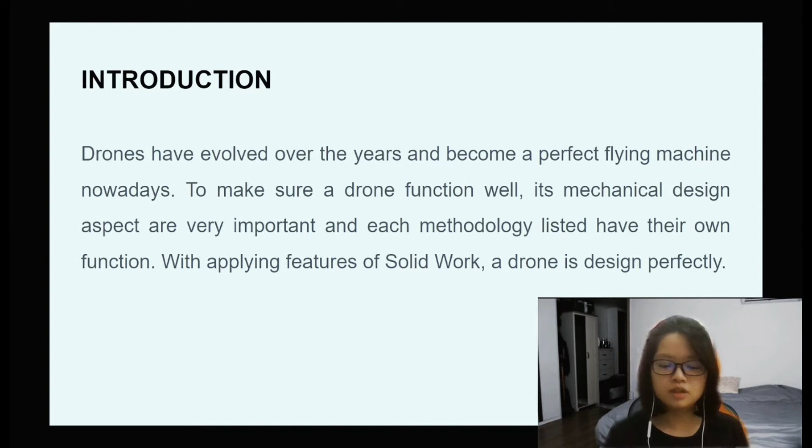Next, I'm going to introduce what a quadcopter is. Actually, a quadcopter is called a drone, and drones have evolved over the years to become a perfect flying machine nowadays. To make sure a drone functions well, its mechanical design aspects are very important, and each methodology listed has its own function. In this mini project, we're applying the features of SolidWorks, and a drone is designed perfectly. The objective of the mini project is to demonstrate the detailed design of the quadcopter and to demonstrate how the quadcopter works.

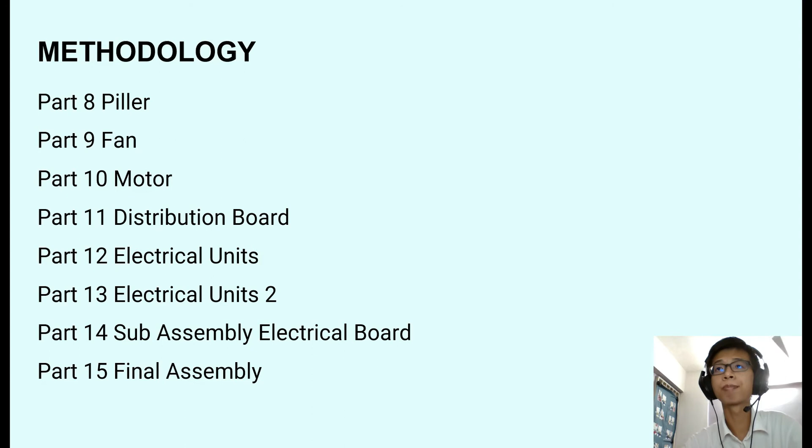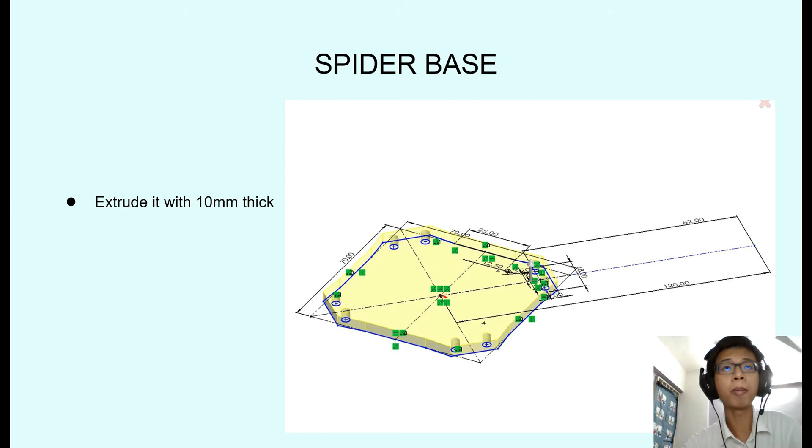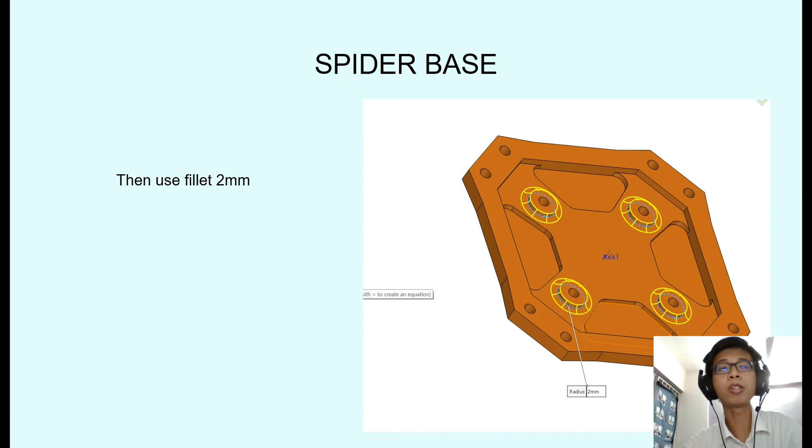This is part 1, spider base. First we use the top plane, sketch a diameter of 70 mm, 25 mm, 82 mm, and 120 mm. Then we extrude it with 10 mm thickness. Then, using the top plane, sketch a diameter of 12 mm and 50 mm. After that, we draw a 3 mm circle and extrude it with 2 mm thickness. After that, we use fillet to do 4 corners at 2 mm. The spider base is done.

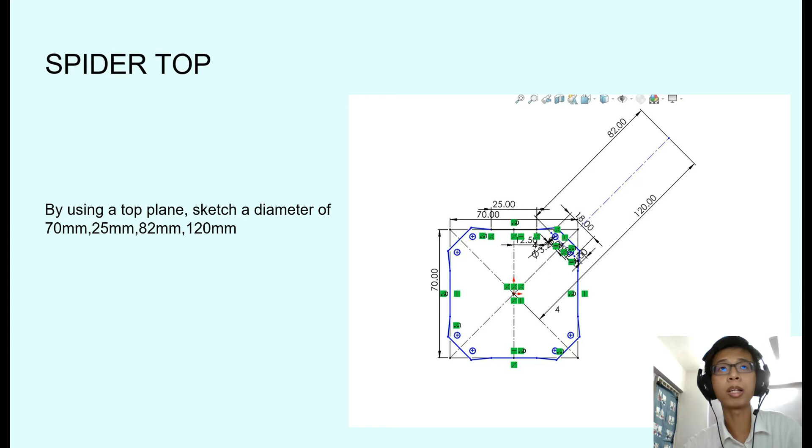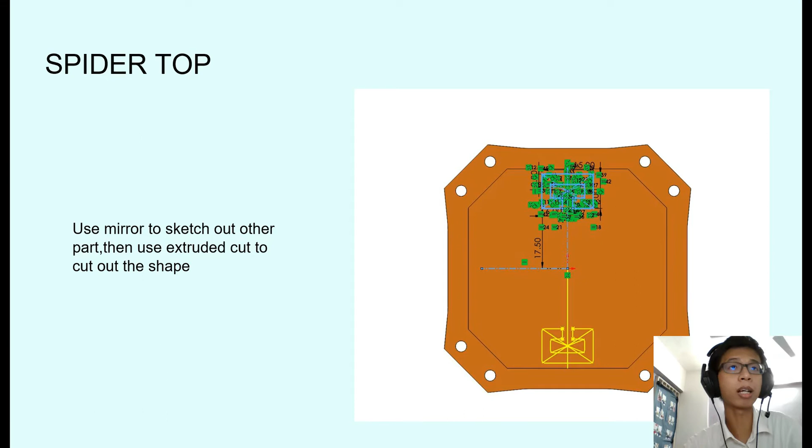Next is part 2, spider top. Same as before, we use the top plane, then use diameters 70 mm, 25, 82, and 120 mm, with 10 mm thickness. Then we sketch the diameter 50 mm, 3 mm, 10 mm, 6 mm, and a 2.8 radius. After that, we use mirror to sketch out the other part, then use extrude cut to cut out the base shape. Then we sketch a diameter of 35 mm and 30 mm and extrude cut to cut out the shape. The spider top is done.

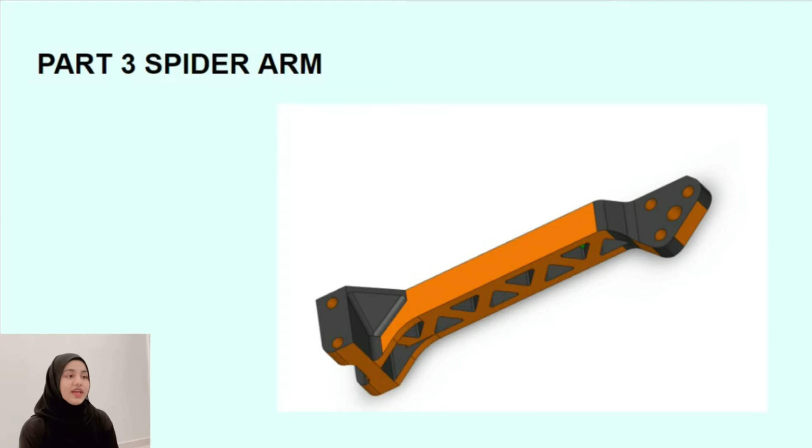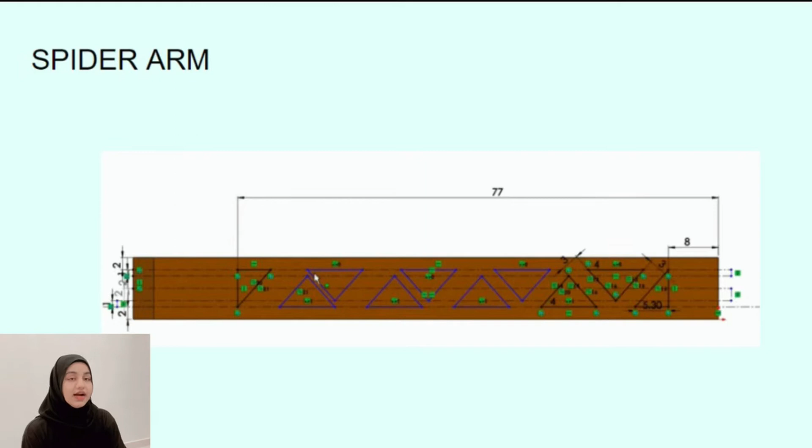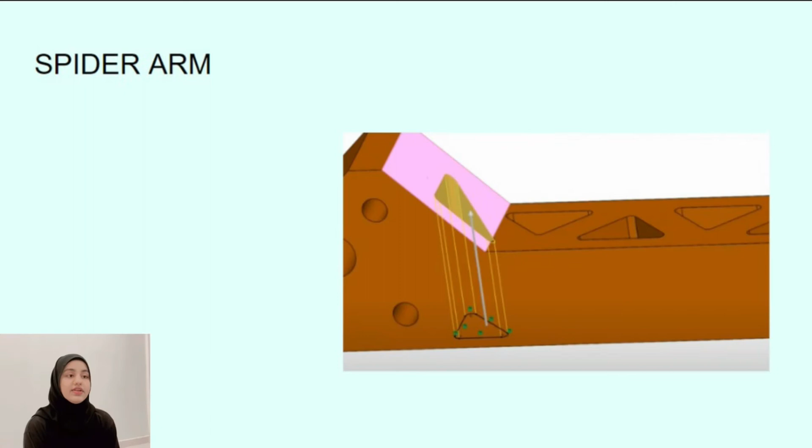I produced this spider arm with the right size so that I can produce a perfect drawing. After pressing the extruded boss button to turn my sketch into a 3D drawing, this is the result. To make it more interesting, I added color to the spider arm to look more attractive. Then I continued to create a triangular pattern on the leg of the drone to further beautify the spider arm part. After I drew a 2D drawing, I converted it to 3D. Not only that, I designed the spider arm into a more complex look. Using the tools provided in SolidWorks, I used fillet tools to curve all the constructed triangular parts on the sharp sides. After that, I added 2 more shapes in the spider arm, this part and also this part. Then I removed a few parts here using the extruded cut tool according to the proper size. For the finishing part, I used fillet tools and the chamfer parameter. I also put a small hole for the stand. Finally, the important part, the spider arm, was complete.

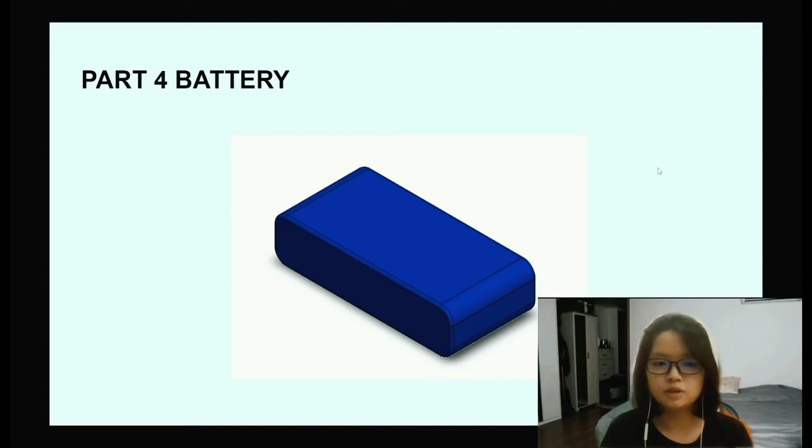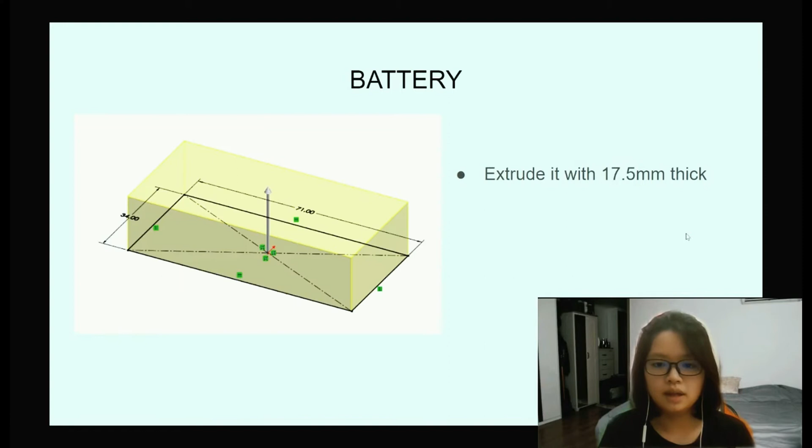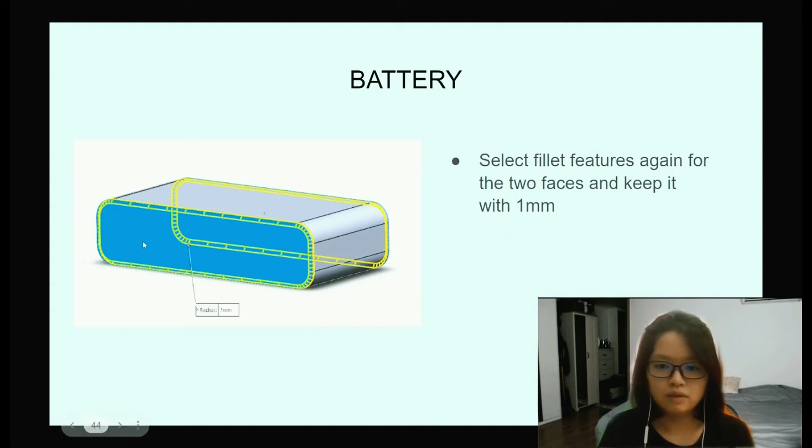For the battery, using the top plane, sketch a diameter of 71 mm by 34 mm, then extrude it with 17.5 mm thickness. Next, we use fillet features for 4 corners, each with a 5 mm parameter. Select the fillet features again for the 2 faces and keep it at 1 mm. Lastly, choose a blue low gloss plastic color for the battery.

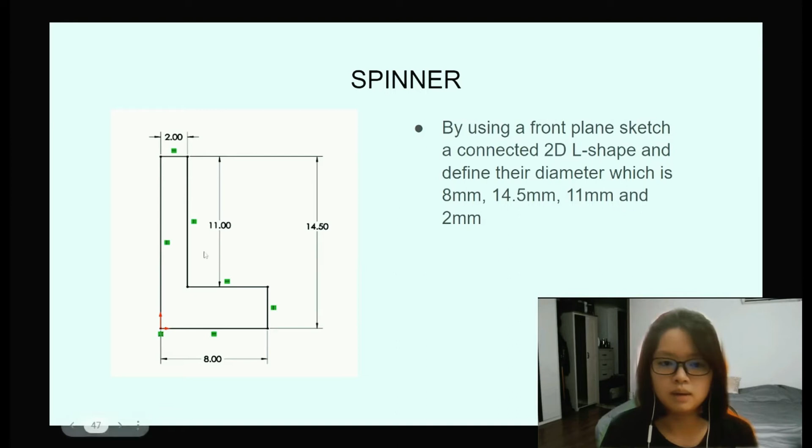In the next part, part 5, called the spinner: we use the front plane and sketch a connected 2D L-shape, defining the diameters as 8 mm, 14.5 mm, 11 mm, and 2 mm. Next, we revolve it, selecting the vertical line as the axis. Next, we draw a big circle with a diameter of 9 mm and use the hole wizard feature to make 4 positioned holes.

Lastly, we define some metal color for the spinner.

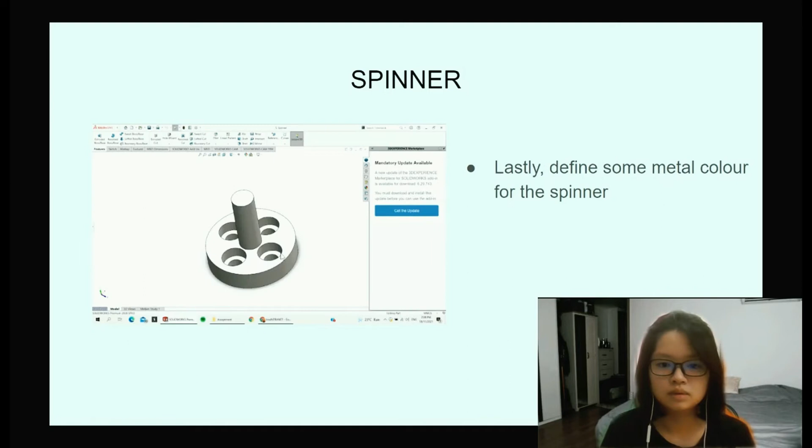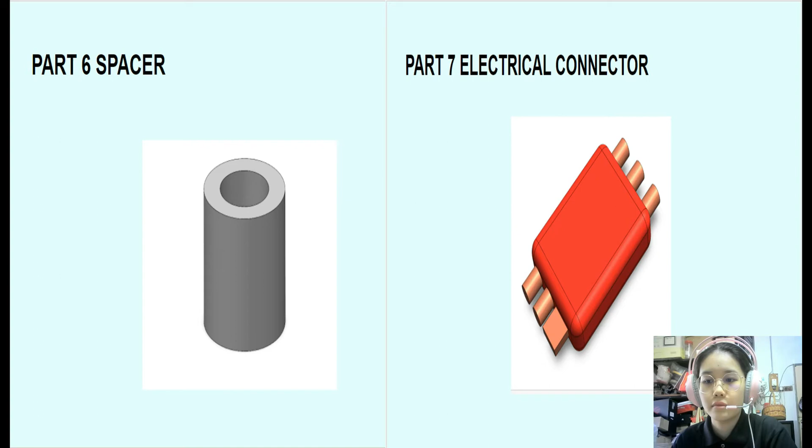I will present 2 parts of the quadcopter. It is the spacer and the electrical connector. To start with, select top plane, sketch 2 circles, and the length is 5 mm and 3 mm. Select extruded base, and the dimension is 6 mm. Last, the spacer is done.

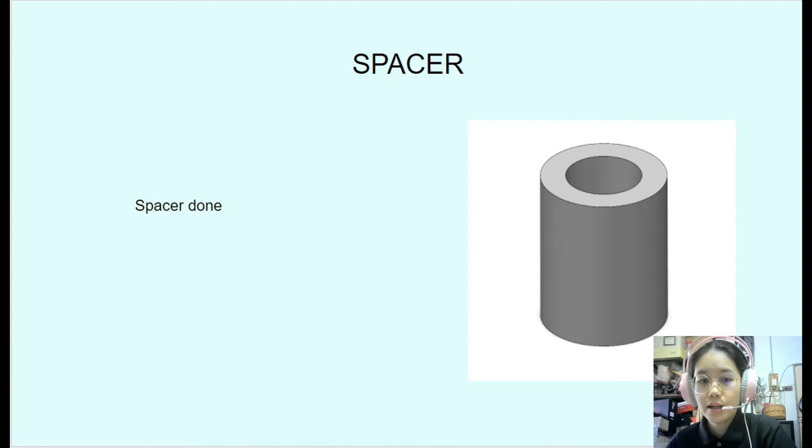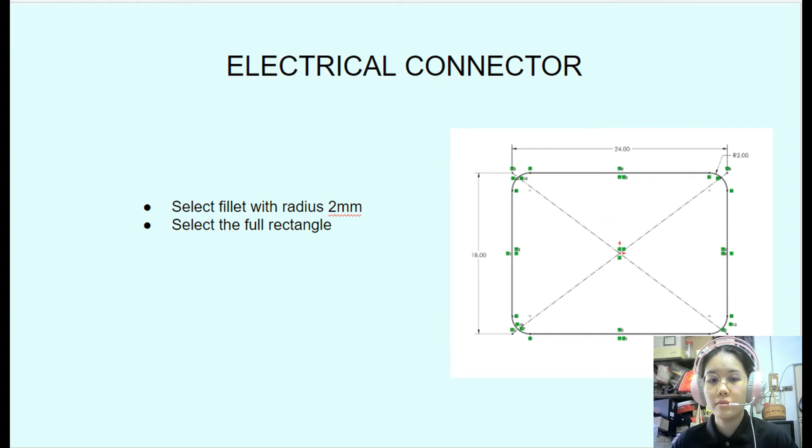Continue with the electrical connector. Select top plane and sketch 1 rectangle, dimension is 16 mm width and 24 mm length. Select fillet with radius 2 mm. Select the full rectangle. Select extruded base with the dimension 7 mm.

Select fillet. Select up face and down face with the dimension 2 mm. Select the full rectangle. Apply red low gloss plastic color on it. Next, select side face of the rectangle. Select normal to. Draw a center line in the middle and sketch 3 circles. Select 3 circles. Make it relation equal.

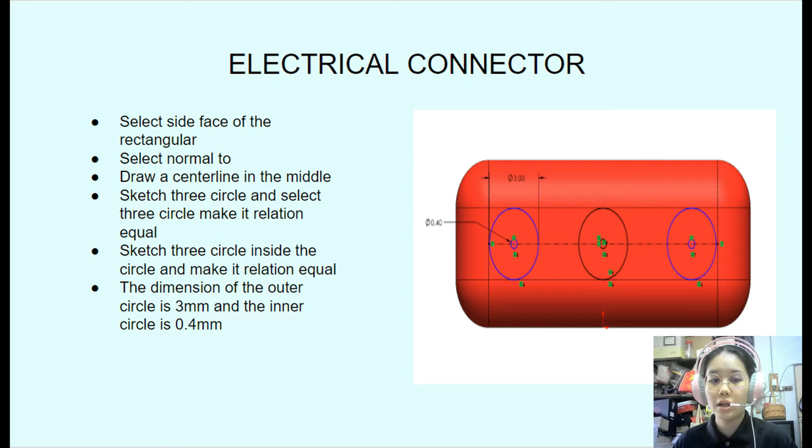Sketch 3 circles inside the circle and make it relation equal. The dimension of the outer circle is 3 mm and the inner circle is 0.4 mm. Select the extruded base with the dimension 4 mm. Select the 3 circles and apply polished copper color on it. Last, select the other side of the rectangle.

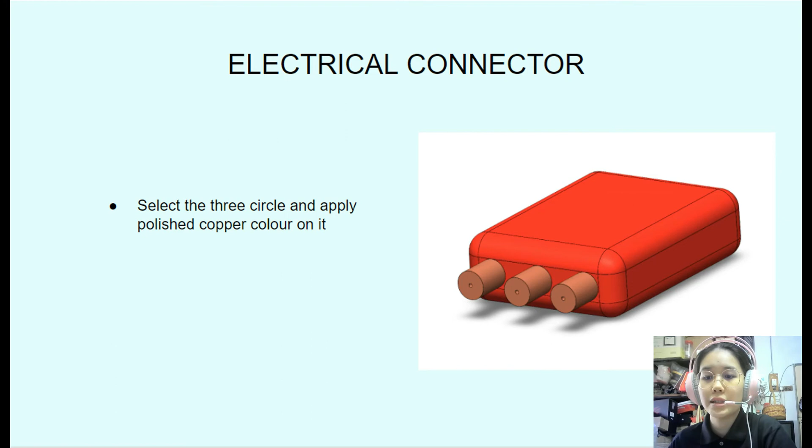Select normal to. Select center line and draw a line in the middle. Select corner rectangle and sketch the rectangle at the right with the dimension 4.5 mm length and 1.5 mm width. Make it relation equal with the center line. Sketch 2 circles, 1 in the middle and 1 at the left side.

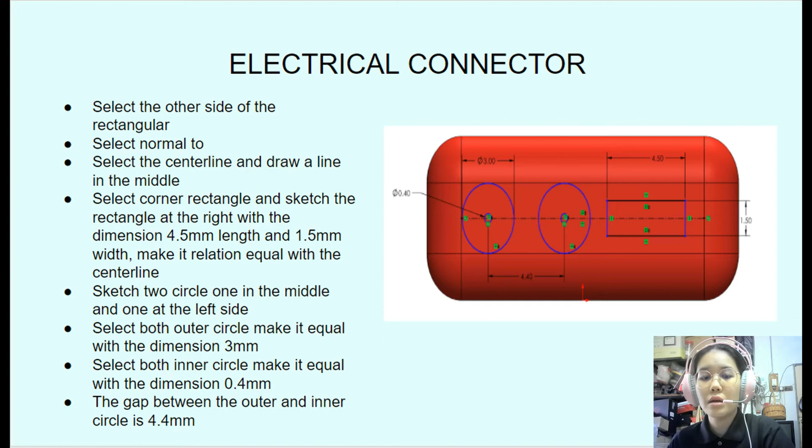Select both outer circles, make it equal with the dimension 3 mm. Select both inner circles, make it equal with the dimension 0.4 mm. The gap between the outer and inner circle is 4.4 mm. Select extruded base and apply polished copper color on it. Finally, the electrical connector is done.

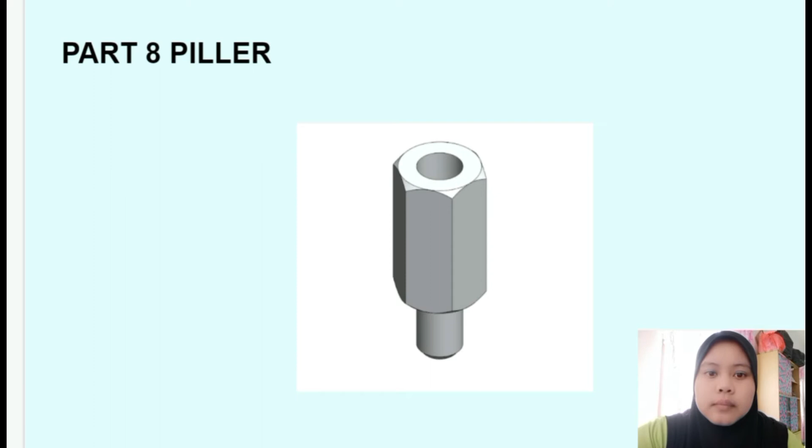I want to explain about my part. Part 8 is the pillar. First, select top plane and sketch the circle with dimension 2.5 mm. Extrude the circle until 3.9 mm. Select the circle face and sketch using polygon. The polygon is bigger than the circle.

Select any side of the polygon and select vertical to make dimension 4.5 mm. Next, extrude it from 2D to 3D. Next, select polygon top face and sketch the circle with dimension 2.5 mm. Extrude cut the circle and make the hole inside with 4.8 mm.

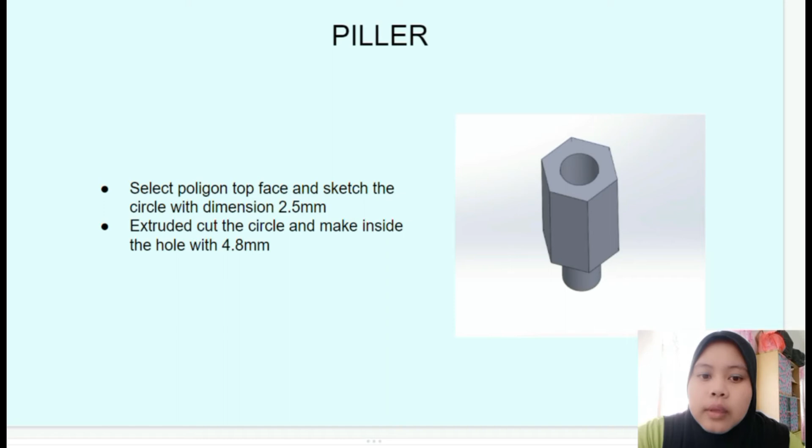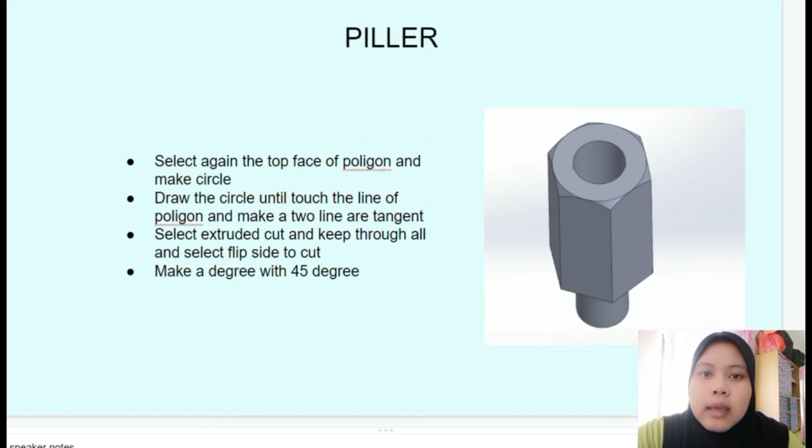Next, select again the top face of the polygon and make a circle. Draw the circle until it touches the line of the polygon and make two tangent lines. Select extruded cut, keep through all and select flip side to cut. Make the angle 45 degrees.

Next, select the bottom of the polygon. Draw the circle until it touches the line of the polygon and make two tangent lines. Select extruded cut, keep through all and select flip side to cut. Make the angle 45 degrees.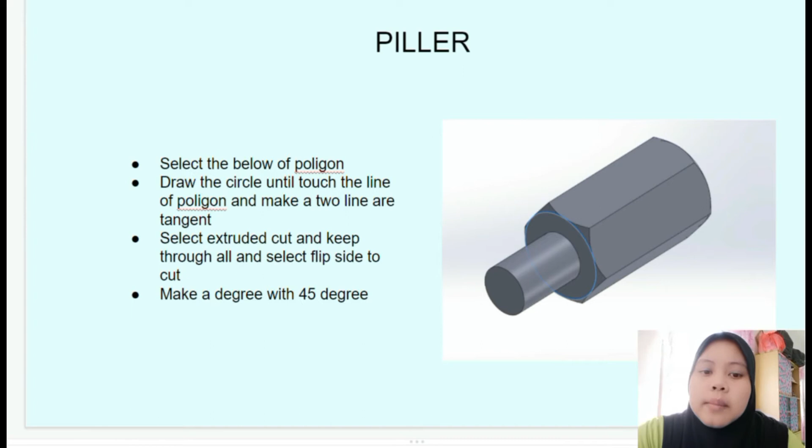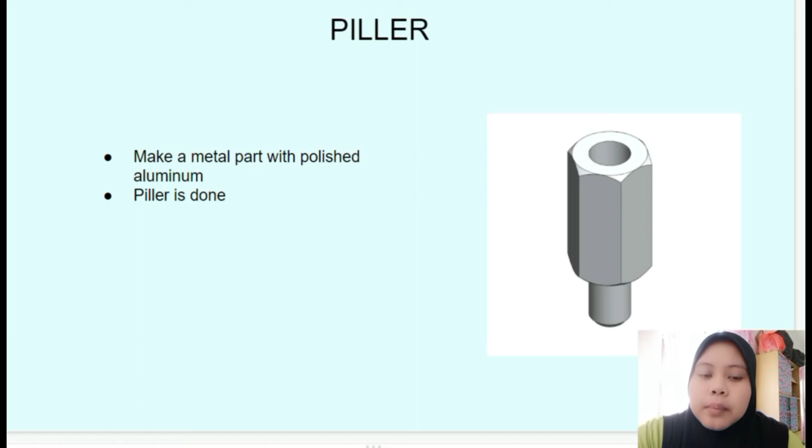Next, select chamfer and select the line of the circle with dimension 0.3 mm. Next, make it a metal part with polished aluminium. Pillar is done. Thank you.

Next part is part 9, the fan. First, select top plane and sketch the circle with dimension 11.5 mm. Select extruded boss and extrude it to 6 mm and keep mid plane. Select front plane and sketch using center line. Draw the center line diagonally.

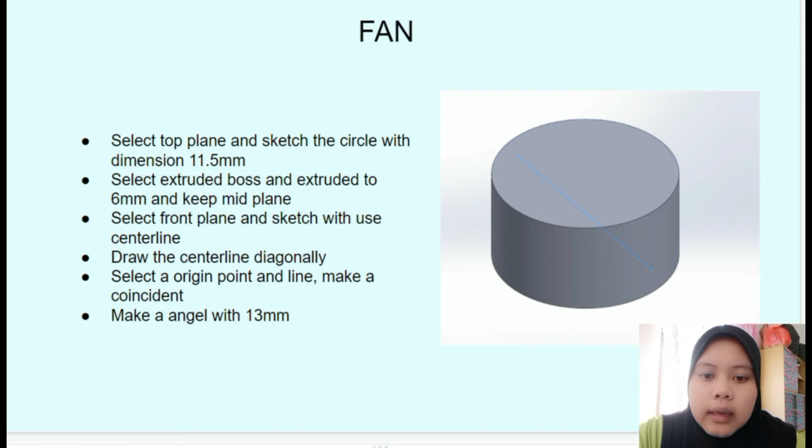Select the origin point and line. Make a coincident. Make an angle with 13 mm. Next, select the center line, go to reference geometry, select plane and choose front plane. Select the plane and select normal. Click the circle and convert entities.

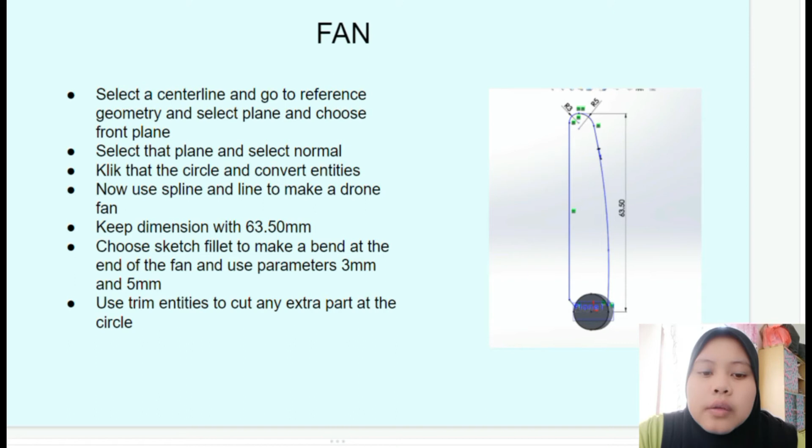Now use spline and line to make a drone fan. Keep dimension at 63.5 mm. Choose sketch fillet to make a bend at the end of the fan and use parameters 3 mm and 5 mm. Use trim entities to cut any extra part at the circle.

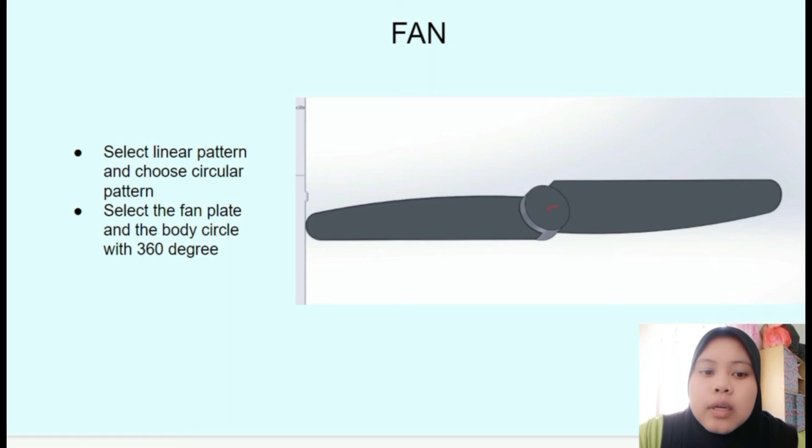Next, extruded boss at the fan plane using 0.3 mm and mid plane. Next, select linear pattern and choose circular pattern. Select the fan plate and the body circle with 360 degrees. Next, select the face and circle. Select the face of the circle and select circle to make another circle with dimension 5 mm.

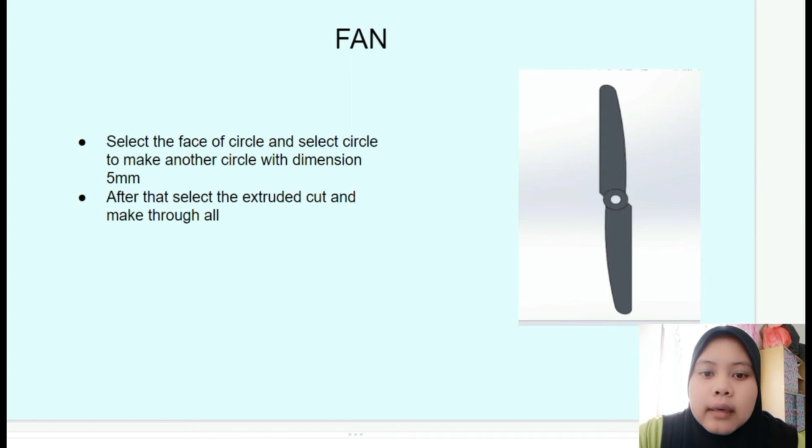After that, select the extruded cut and make it through all. Next, select the fillet at features and choose chamfer. Select the inside circle with distance 1 mm. Next, select the appearance color for all bodies with green low gloss plastic. Now the fan is done.

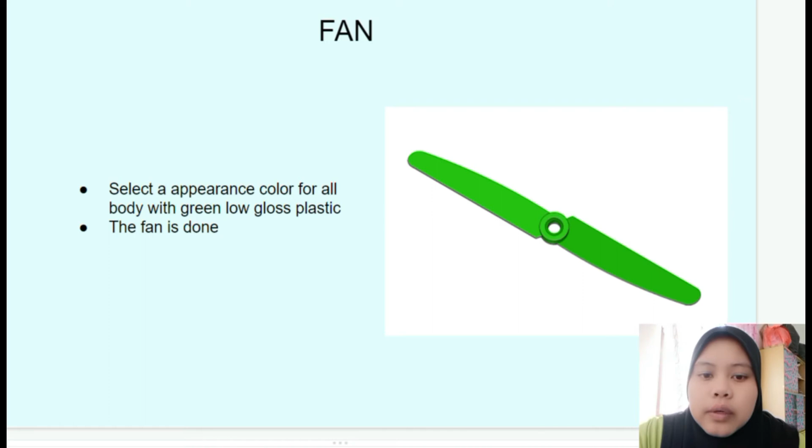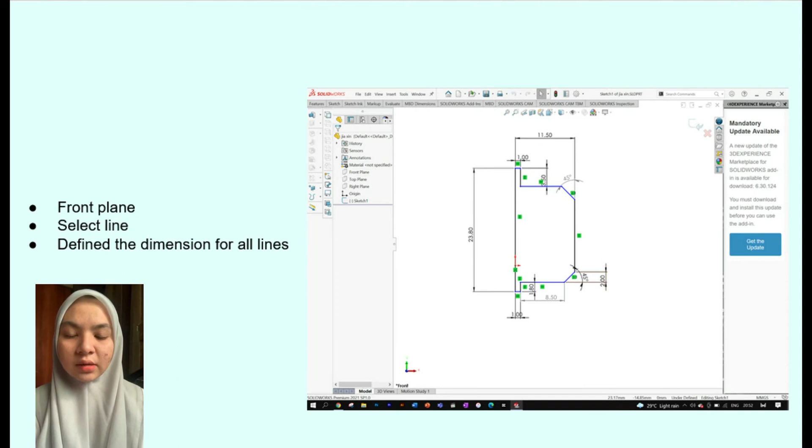I want to present part 10, which is the motor. Firstly, select front plane and then sketch. Then select line. After drawing the line, define dimensions for all the lines. Second step, select line, then draw inside the first drawing. Then define dimension 1 mm for all lines.

After that, select line again and draw over the bottom corner. Select trim entities and trim the parts that need trimming. Then select smart dimension and define dimension. After done with the drawing, choose features, then select revolve boss and select the line axis. So the body is revolved.

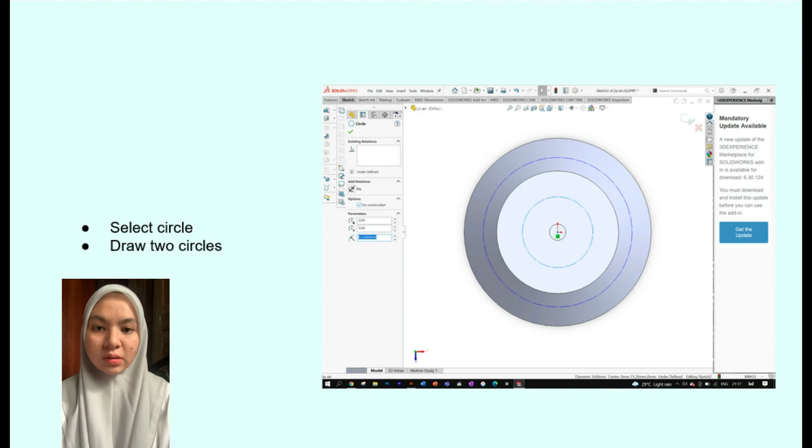After that, select top surface, sketch, then choose normal. Next step is select circle, then draw two circles. After drawing the circle, select for construction, then choose construction geometry. Select smart dimension, then define the circle dimension for 9 mm. After that, select center line, then define it 9 mm.

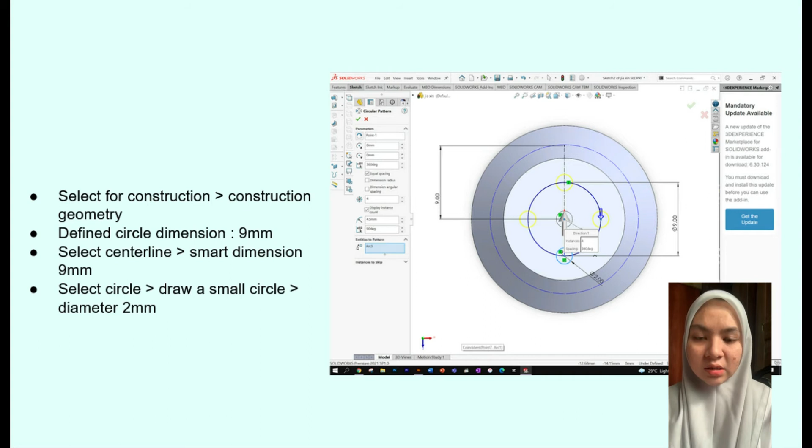After done with that, select circle again and draw a small circle and keep the diameter 2 mm. After that, select circular sketch pattern and select the small circles. Set 4 for number of circles. Select circle and draw a circle again on top with diameter 6 mm.

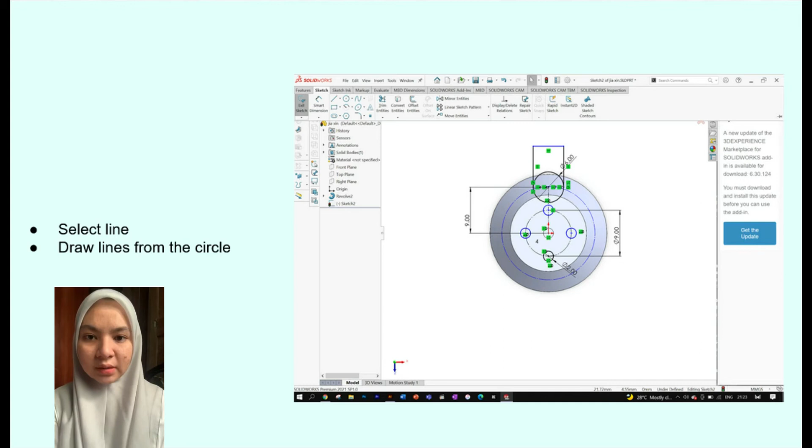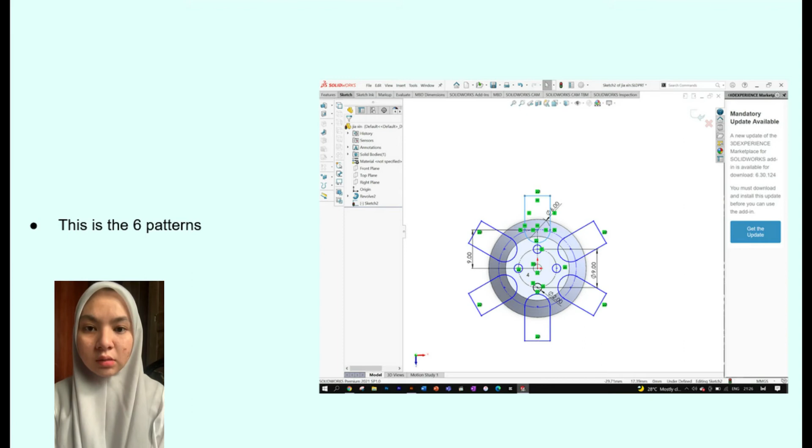The next step is draw pattern. Select line and draw line from the circle to make the pattern. After that, select trim entities and trim the half circle. Select circular sketch pattern, then select the half circle and choose 6 for number of patterns. So these are the 6 patterns that I drew earlier. Next, select extruded cut and keep direction for 4 mm. So this is the motor body, it is almost ready.

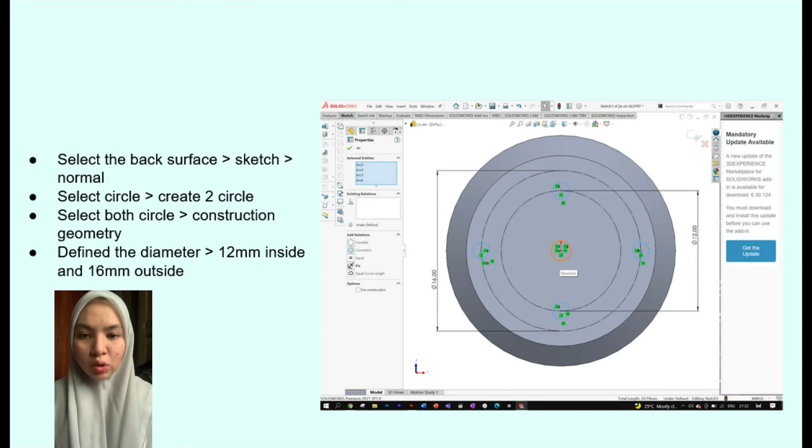The next step is select the back surface, sketch and choose normal. Then select circle and create two circles. Select both circles and choose construction geometry. Define the diameter to 12 mm for inside and 16 for outside. Then draw 4 small circles. Select all the small circles and make a relation equal. Define the diameter to 2 mm. After that, select extruded cut and make the depth inside to 3 mm.

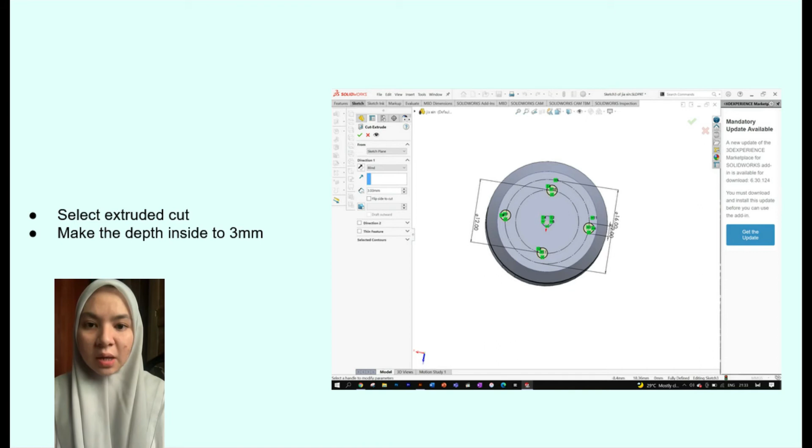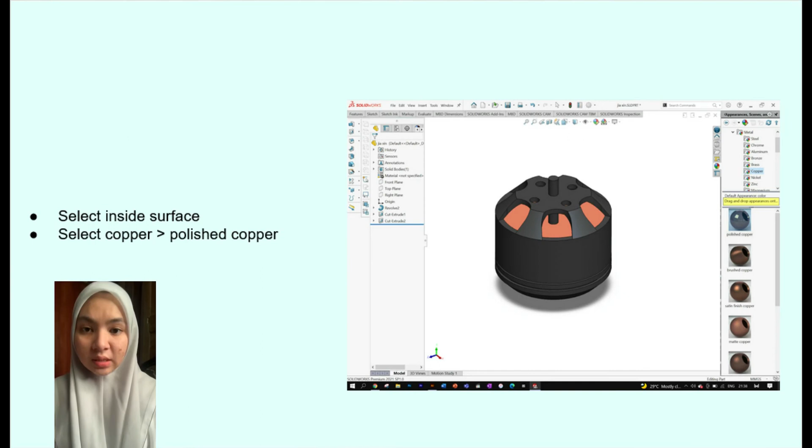So this is the motor aluminium cast body. After it becomes an aluminium cast body, go to appearance. In metal, choose aluminium and then at the bottom, choose black anodized material. Lastly, select the inside surface, then select copper and choose polished copper. So this is the overall 3D motor.

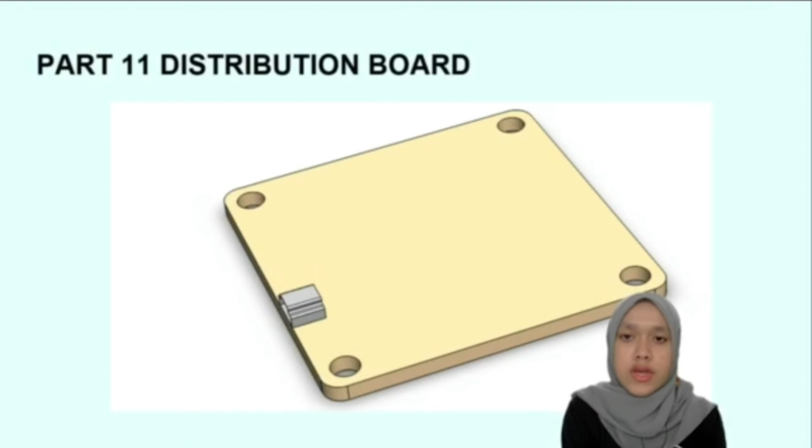Today I would like to present a distribution board. Choose top plane, select center rectangle and draw the rectangle. Select smart dimension and define length to 36 mm. Select center rectangle, make it at the center point and define length 30.50 mm. Select both lines and make equal.

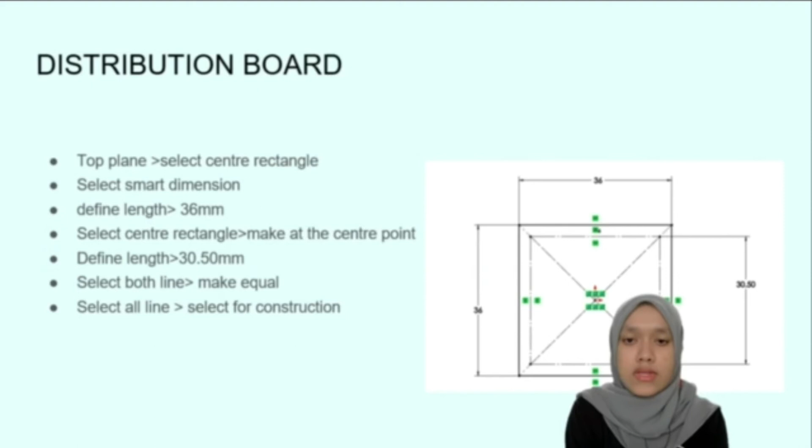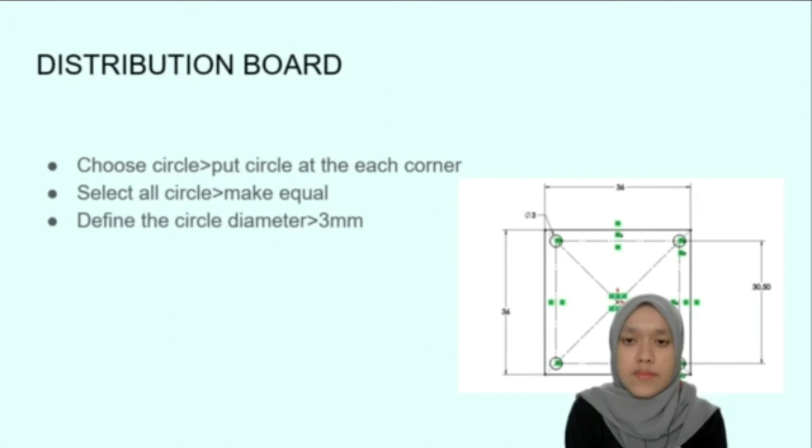Select all lines and select for construction. Choose the circle and put a circle at each corner. Select all the circles and make equal. Define the circle diameter as 3 mm. Select the sketch fillet, use 2 mm and select all the corners. Select extrude boss base. Keep the thickness for the visual support at 1.57 mm.

Next step is select the side face. Select sketch number 2 to make the USB port. Select center rectangle and make the center rectangle at the top of the side face. Define the length 2 by 4 mm. Select line and select trim entities. Select sketch fillet. Make radius 0.2 mm. And choose the corner.

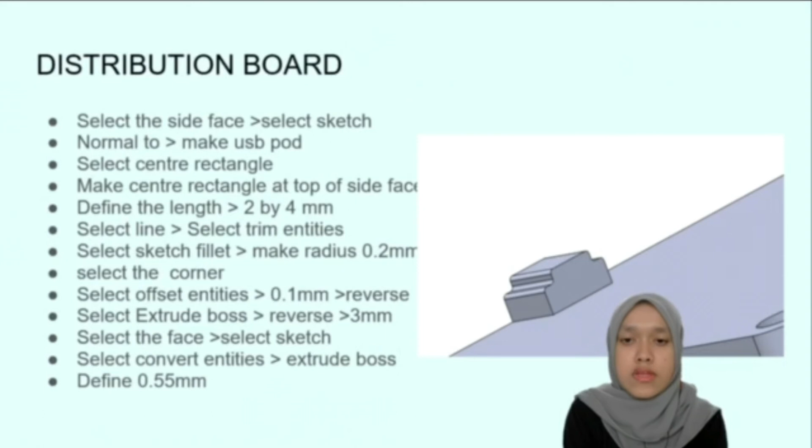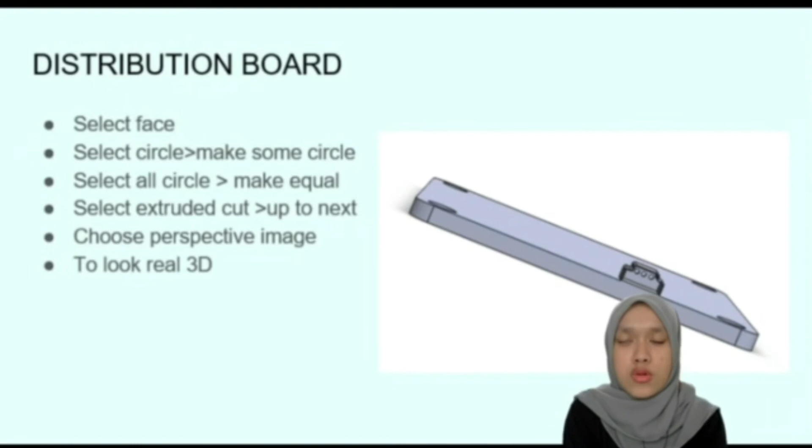Select offset entities 0.1 mm and reverse direction. Extrude boss. Reverse. Select the sketch. Choose convert entities and 0.55 mm. Select face. Select circle and make some circles. Select all circles and choose make equal. Click extrude cut and select up to next. Choose perspective view to look real 3D. That's all for my part, the distribution board.

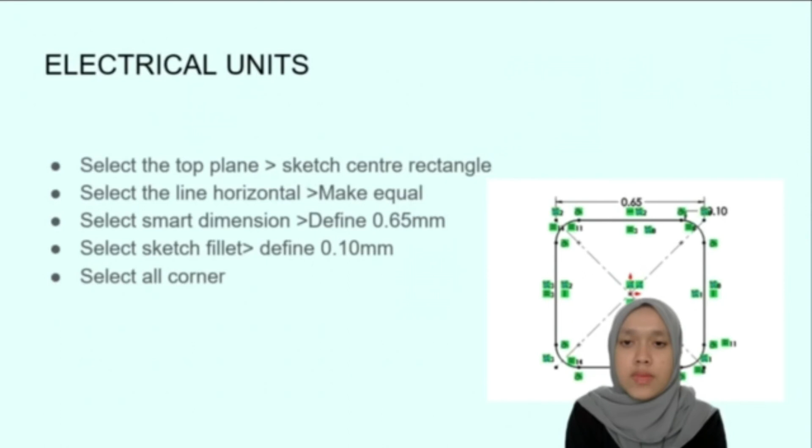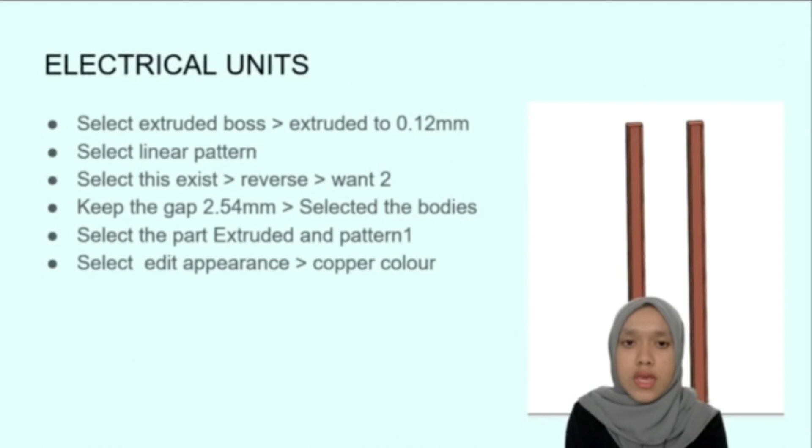Next, I will continue with the header unit. Select the top plane. Click sketch center rectangle, the line horizontal and make equal. Select smart dimension and define 0.65 mm. Choose sketch fillet and define 0.1 mm. And select all corners. Select extrude boss, extrude to 0.12 mm. Select linear pattern. Select this axis, reverse direction and want 2. Keep the gap 2.54 mm and select the bodies.

Select the bottom face. Select reference geometry. Plane 3.0 mm. Select flip direction and flip planes. Select number 2. Draw the center line. The line is defined 5.08 mm by 2.54 mm. Select sketch chamfer. Define 0.50 mm and select all 4 corners. Next step, select extrude boss.

Define 2.5 mm and select reverse direction. Select the material. Choose the dark color to hide the pin. Click the pin and choose hide pin. Select linear pattern. Select this line and click reverse direction.

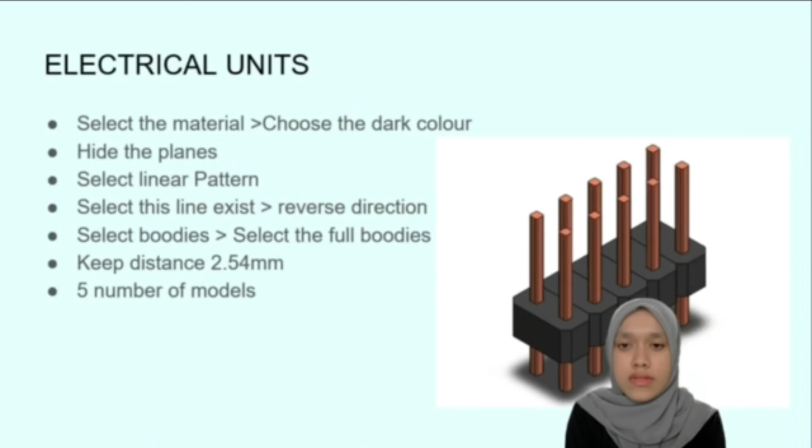Select body. Select the full body. Keep distance 2.54 mm and click five number of model. Insert. Click insert. Keep features and combine. Select all 5 bodies and select add and click OK.

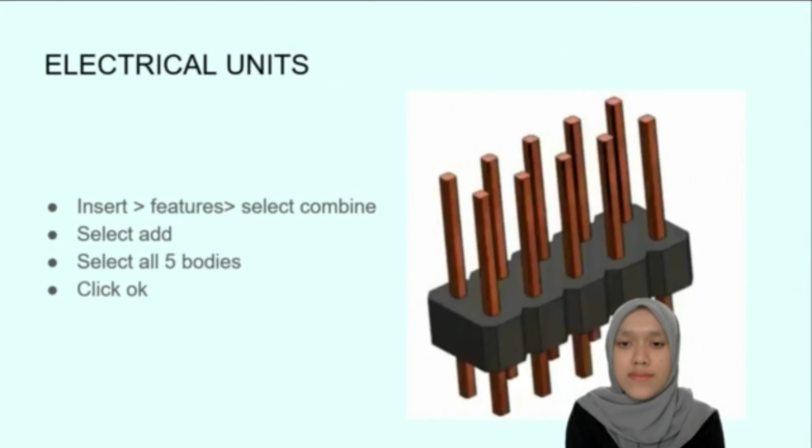Next, I want to present part 13, electrical unit 2. For the first step, select top plane and sketch one rectangle. Then select vertical and horizontal, make relation equal. Select smart dimension and define 0.65 mm.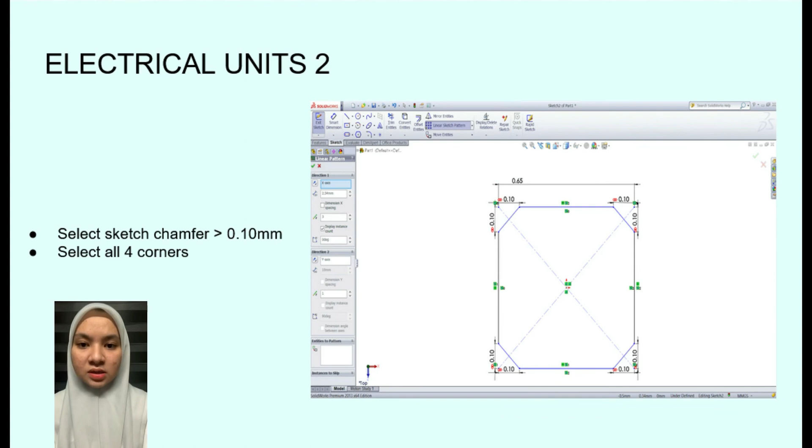For second step, select sketch chamfer and define to 0.10 mm, then select all 4 corners. After that, select linear sketch pattern, set 2.54 mm for x-axis and 3 for dimension spacing. Then select all the lines and keep distance 2.54 mm for 3 numbers.

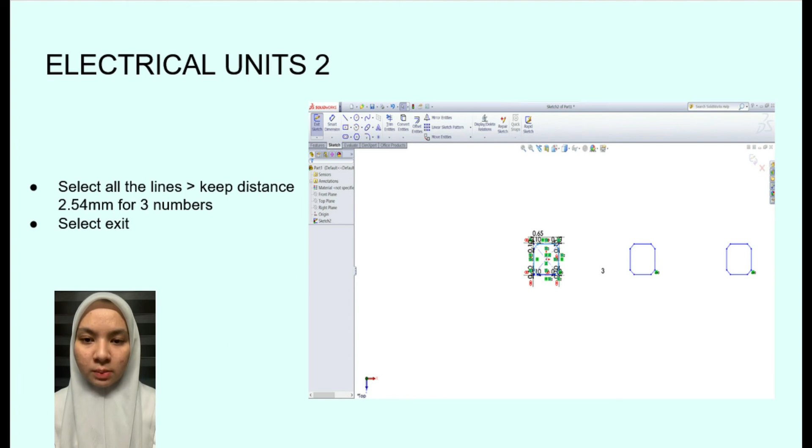After that, select exit. For the next step, select front plane, sketch then select normal. Then select line and draw line to make 3 geometry. After done with that, make relation and select 3 points at the end point and select vertical.

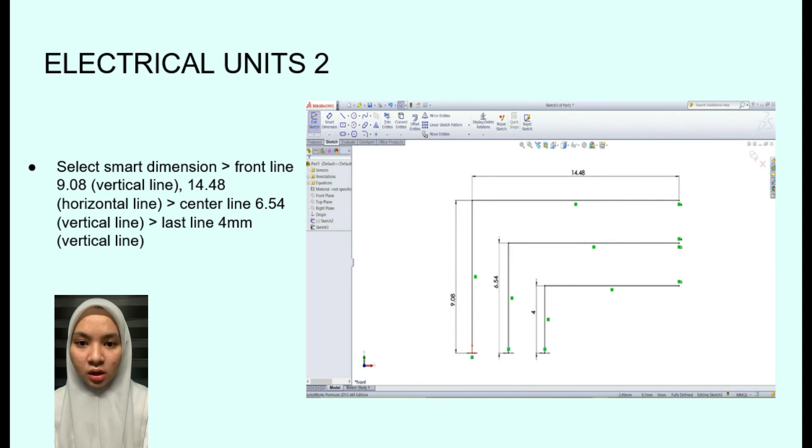After that, select smart dimension and define 9.08 mm for first geometry at the vertical line, 14.48 at the horizontal line for second geometry, 6.54 mm at vertical line and 4 mm for third geometry at vertical line. Next, select fillet and keep radius 1 mm. Select all corners, then select exit.

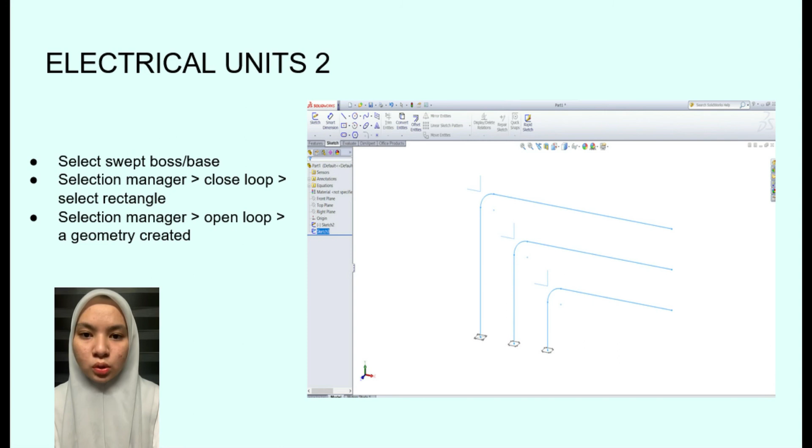After that, select swept boss. Then select selection manager and choose closed loop, then select rectangle. Select selection manager again, then choose open loop, so geometry created. Then, next step, repeat same process until 3 geometry created. After that, select all 3-part geometry, then select material and choose copper.

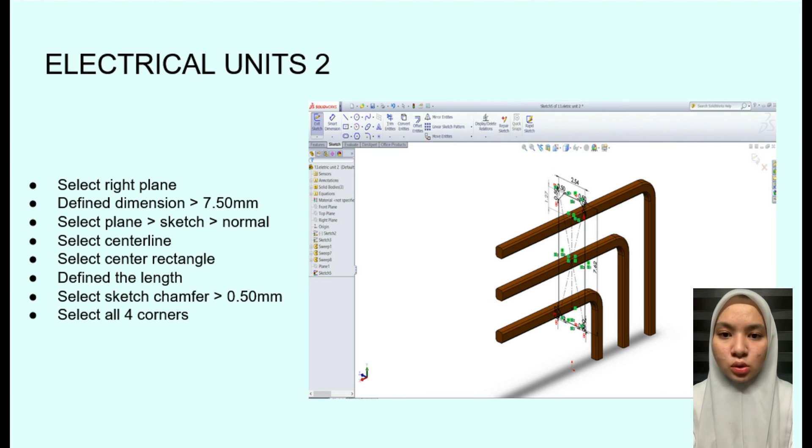Next step, select right plane and define to 7.50 mm. Then select plane, sketch and choose normal. After that, select center line, then select center rectangle. Define the length 7.62 mm for vertical. From outer line, 1.27 mm and top horizontal line is 2.54 mm. Then select sketch chamfer 0.50 mm and select all 4 corners.

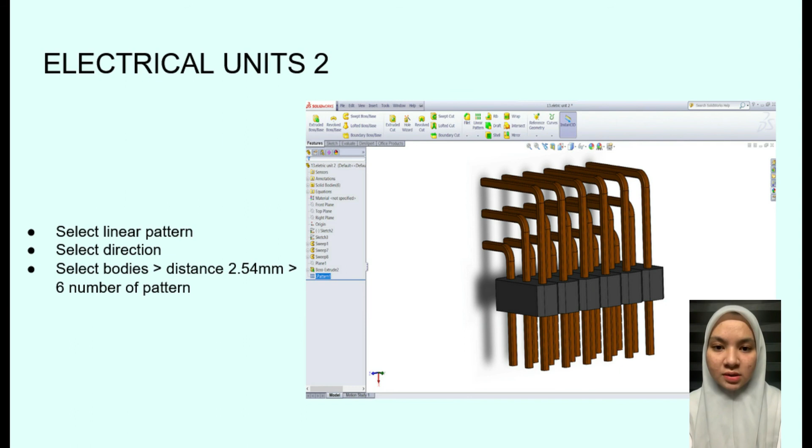After that, select extrude boss and define 2.50 mm. Then select color black. Then select linear pattern and select direction. After that, select body, set distance 2.54 mm and 6 for number of pattern. For the last step, select insert and choose features, then select combine. After that, select all bodies and select add. So after all the steps, it becomes one body of electrical unit 2.

So I will continue for part 14, assembly electrical board. First we need to open the assembly window before we do the next step. And first we need to select distribution panel and open the 3 parts, which are distribution board, electrical unit 1 and also the electrical unit 2. First I will make these 3 parts, distribution board, electrical unit 1 and electrical unit 2, rotatable. So it is easy for me to combine these 3 parts.

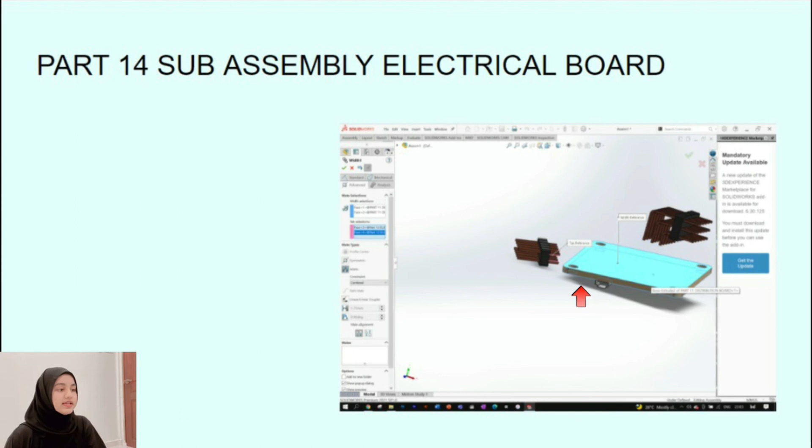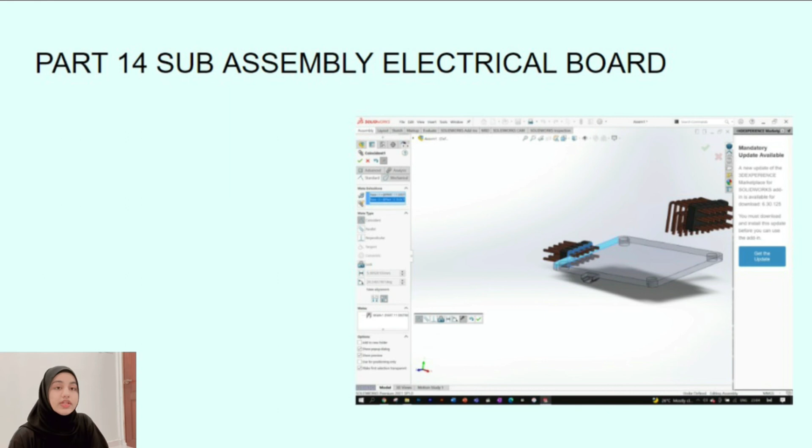Next I will make a relation between faces, which is this one and also this one and this one. Then I go to the standard mate and select these 2 faces, this and also this, and they will automatically combine these 2 things. Actually we can drag this electrical unit 1 wherever we want, but I make the distance between this and also this 8 mm.

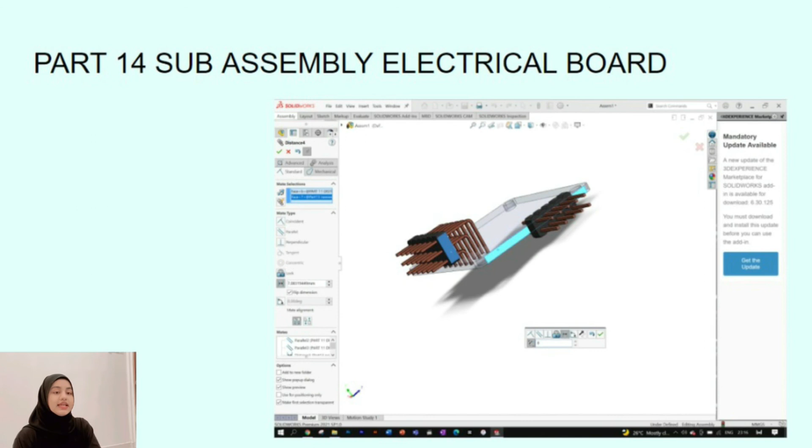Next part we will make a relation between the electrical unit 2 and also the distribution board, and make it parallel, which is we click this face and also this face, then they automatically combine. From this, I will place the electrical unit 2 on the board, and I will make the distance between this face and also this face about 8 mm. So actually it is already fixed and can be continued to the next part, which is part 15.

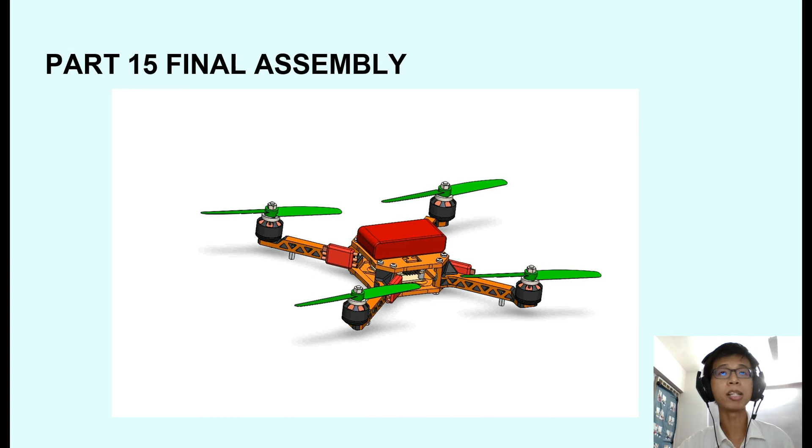Hi, it's my part 15, final assembly. Because of the video presentation time, I will keep it short. All the final assembly is made by the mate function. For example, face A and face B are combined together using the mate function. Then after that, we do the animation for this.

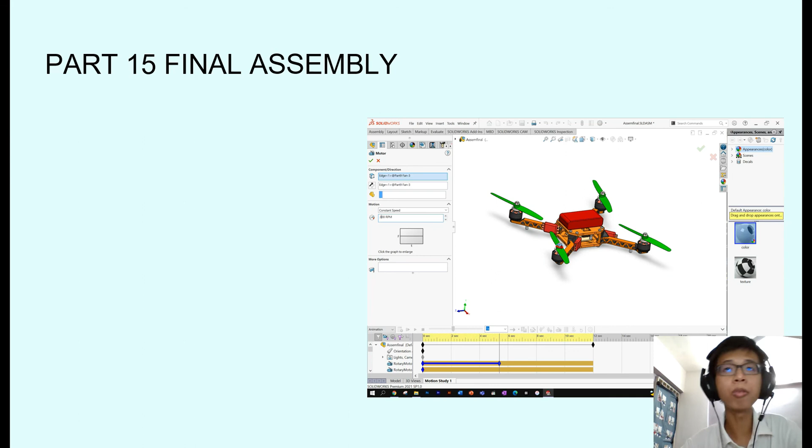So we use the motion study to do the animation. We adjust the animation by using motion study, then we adjust the time and the effect that we need to move. So that's all for this. Then after that, the last video has the animation showing the final assembly.